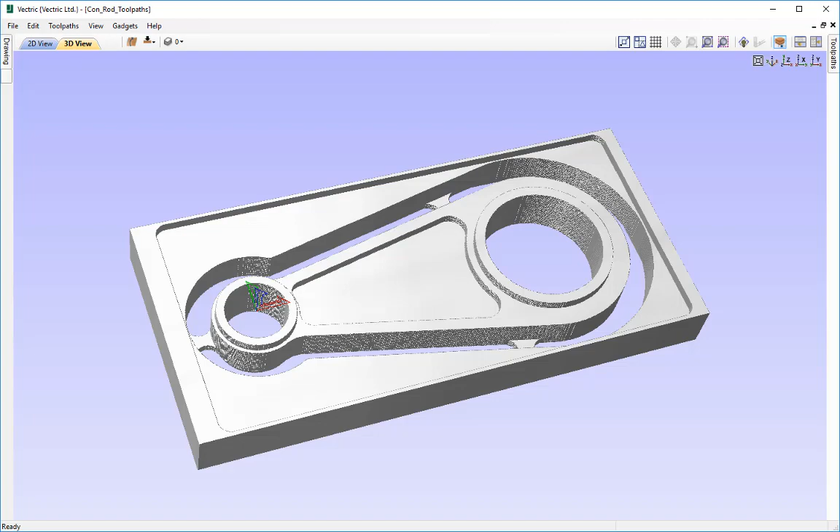In this tutorial, we're going to import some simple vectors into the software and set up a double-sided job to create the conrod that you can see on screen. Then we're going to look at how we can reposition and offset XY position, how to use imported vectors for a two-sided job, and we're going to use a toolpath preview to prevent possible damage occurring whilst machining.

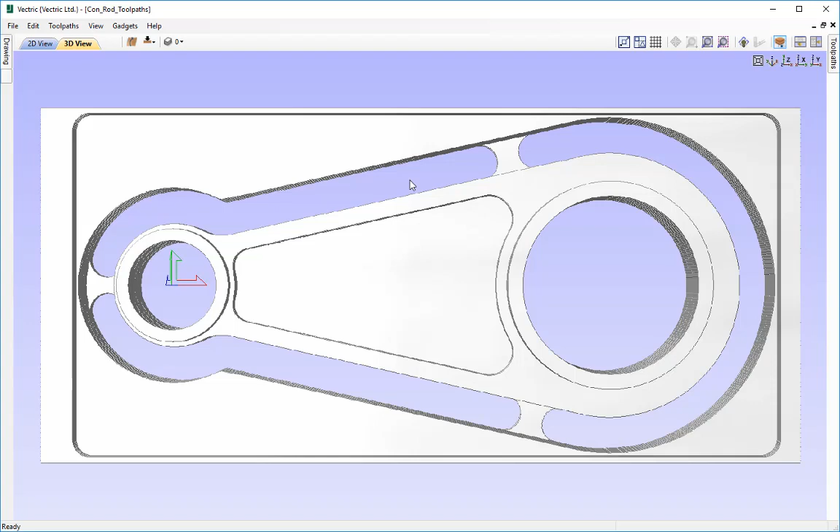So I'm just going to go ahead and close this file down, and then we're going to start by opening a new copy of the software and opening an existing file. So navigate your way through the video tutorials folders and go to the conrod files folder, and then we're going to click on the conrod.dxf file and then click on open.

Then you can see it's imported those vectors in for us from that DXF file, and we immediately entered the job setup form. So the first thing that we're going to do is choose the job type. We're going to choose a double-sided job, and then we're just going to change the job size itself. Now we are going to be working in millimeters for this, so just choose the millimeter option, and then we're going to change the width to 130 millimeters with a height of 60 and a thickness of 12 millimeters.

And we're going to choose the Z0 position. Now when we're flipping the material from one side over to the other, we can Z0 off the same surface, so the material surface as is selected at the moment, or we can change that to the machine bed. Or we can have opposites, so basically the same side is always going to be the reference point for the Z0 position. Now this is always useful when using wood or planks of wood which may be slightly uneven over the surface, so we may not have planed the material first. But in this instance we're going to be using free machining aluminum, so we're actually going to machine off this material surface for both sides.

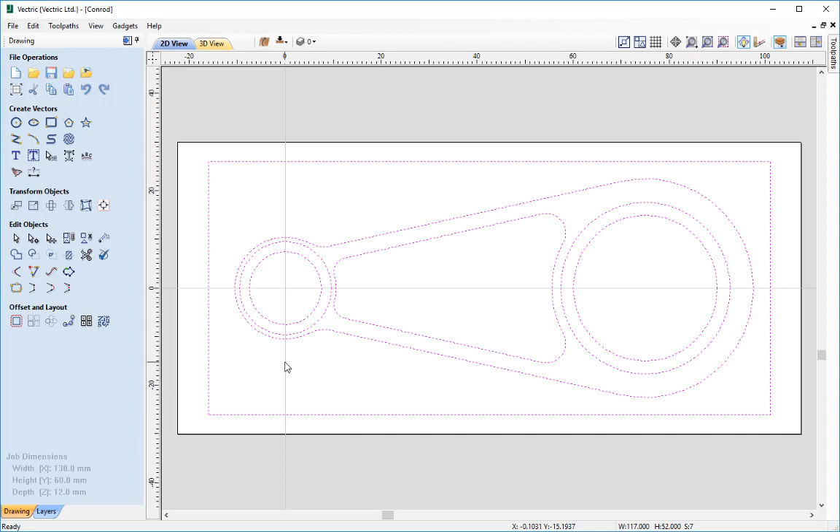So what we're going to do is we're going to press Ctrl A on the keyboard to select all the vectors, and I'm just going to right click them, and I'm going to choose this option to copy to the other side, like so. And if I flip to the bottom side, you'll see that we have those same vectors there, like so. So first thing we're going to do now we've got all the vectors ready, we're going to go over to the Toolpaths tab, like so.

And before creating any toolpath, we should always make sure we check the material setup form. So I'm just going to click the set button there, and just going to go through these. So we've got a thickness of 12 mm. We're going to keep the offset as we've created it. We're going to be z-zeroing off the material surface, and the clearance looks good, and so does the home start position and the z-gap above the material. So I'm just going to press OK to accept those, and now we can start selecting some vectors for our toolpaths.

Now, first of all, we're going to create a pocket, so we're going to pocket down 2 mm to leave this outer rim along the holes of the conrod. So we're going to select the rectangle, hold shift, and then select the outermost circle, like so. Then I'm going to go into the pocketing toolpath, like so. And we're going to have a start depth from the top of the material, so we're going to leave that at 0, and then a cut depth of just 2 mm.

And then for this we're going to be using a 6 mm end mill, so I'm just going to go into the tool database, I'm going to go down to my metric tools, and I'm going to choose an end mill of 6 mm, like so. And what I'm going to do is I'm going to edit those parameters so that they're much more suitable for free machining aluminum.

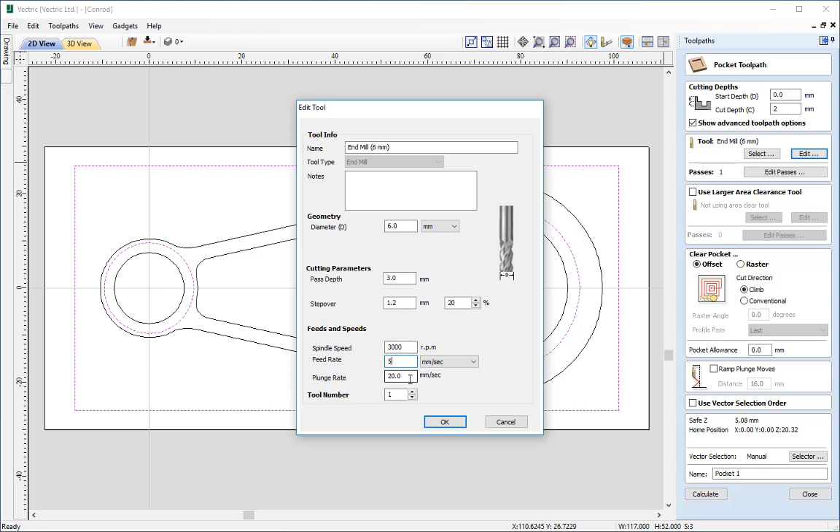I'm going to slow this right down to 5 mm per second. I'm going to have a plunge rate of just 1 mm per second. And I'm just going to press OK. Now what that's done is that's just temporarily edited the values for that tool. So once we're happy with that, I'm just going to go ahead and choose the strategy that we're going to use to clear the pocket.

So I'm just going to keep this as an offset strategy. And then I'm going to choose to ramp the plunge moves over a distance of 16 mm. So I'm just going to type 16 mm there. That just helps protect the tool as it's going down to its cut depth. And then I'm just going to give this a name. I'm just going to call this pocket 2 mm, like so. And just press calculate. And we can preview that if we like. So there you can see what that's done there.

Now we do need to do the same thing for the second side. So I'm just going to press number 2 to flip over to the bottom side. And I'm doing this obviously just so we can preview this in the simulation. So I'm just going to quickly recreate that same toolpath. So everything should be the same, even the edited parameters, as you can see. So all I need to do is just check the ramp plunge moves and just call this pocket 2mm. Again, calculate and preview. So it should look exactly the same as the top side.

So I'm just going to press the number 1, it's going to go back over to the top side. I'm going to go into the 2D view to create our next toolpath, which is going to be this vector here. Now this vector is here to create basically a pocket which is going to be used to lighten the whole weight of the conrod itself. And we're going to do this again on both sides. So I'm just going to select that vector and press close and go to the pocket toolpath, like so.

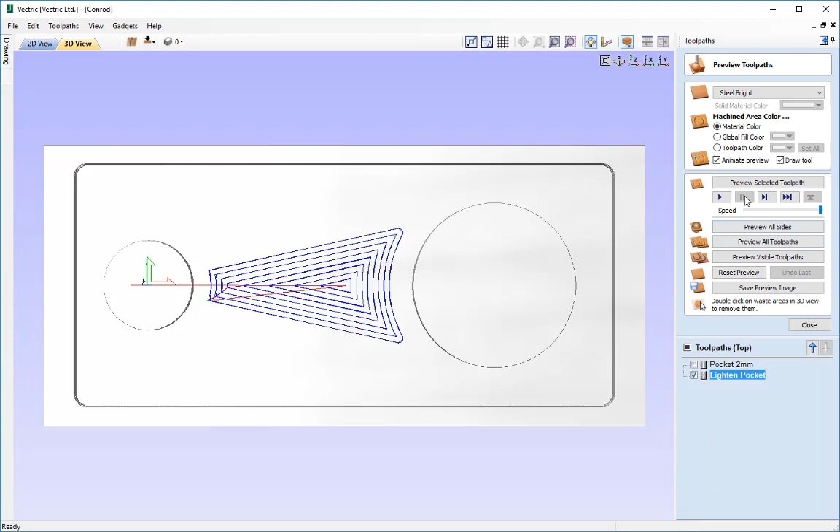Then we're going to have a start depth from the top of the material again, and just going to cut down 4mm. So just make sure that we put that in there. And I'm just going to use the same tool, the end mill of 6mm. I'm just going to press edit to make sure that those edited parameters still exist, which they do. And I'm just going to use the same strategy. I'm going to ramp down of 16mm. I'm just going to change the name of this to something more relevant, like lighten pocket, and then press calculate and preview, like so. Just going to do the same again on the second side.

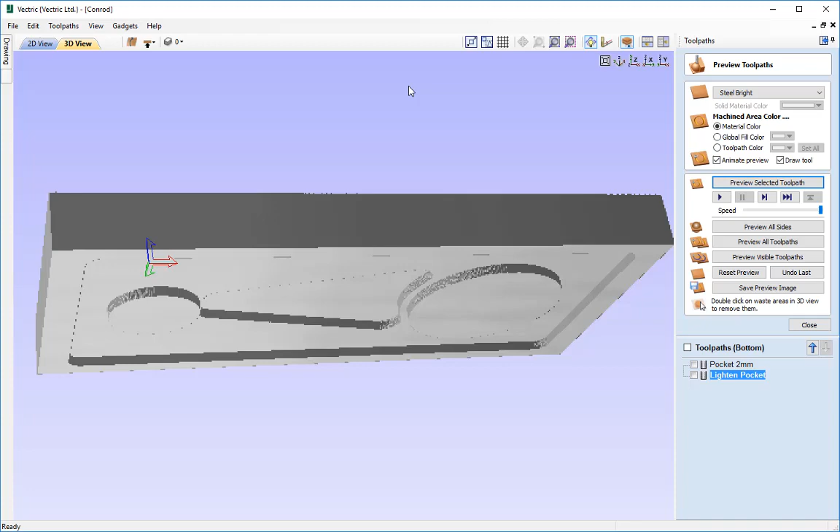So select the vector, go into pocket, everything should be the same, just make sure, and ramp and change the name to lighten pocket, like so. Just calculate that and preview that again. So you see that now we'll have something that looks exactly the same on both sides, like so.

So I'm just going to go back up to the top side, and next I'm actually going to pocket out the holes for the conrod itself. So I'm just going to shift and select the second hole there and press close, go into the pocket toolpath. Now here I can actually pocket all the way down to the bottom of the material, so I can create, for simulation purposes, just the one toolpath here.

Now I could actually use a profile toolpath here if we were using a vacuum hold down table or some other form that secures any waste material from being flung out or causing any damage to the tool or the actual part itself. So I'm just going to presume we're not, so I'm just going to pocket out that material and presume that we're just going to be extracting all that waste.

So let's change the cut depth to 12mm, which is the thickness of the material. Make sure we've got that end mill 6mm selected and the edited parameters are still the ones that we've chosen, like so. I'm just going to scroll down and I'm going to make sure that we've got the offset strategy selected.

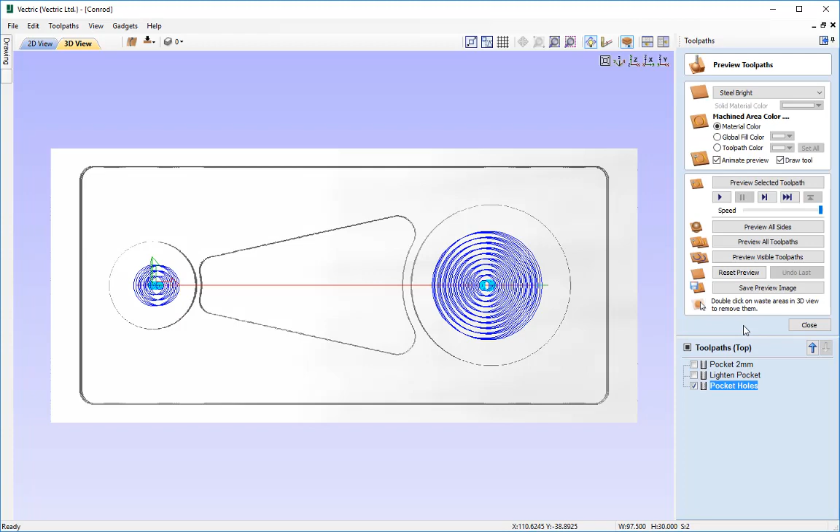Ramp the plunge moves 16mm. That value should actually still be there. And we're just going to call this pocket holes, like so. Calculate that and then we can preview. You see that's gone right through to the other side of the material, like so. So we don't actually need to create that one on the other side.

So next we can create the cutout path. So let's go into the 2D view and select the vector for the cutout, like so. Just close that. And then we're going to select the profile toolpath. So we're going to start the cut from the top of the material, so 0, 0, and we're going to cut down to 12mm, which it currently is set at there. So I'm just going to change that.

Now we do have, as you can see, the end mill of 6mm selected currently, which is good, but does it have the same parameters that we specified for cutting free machining aluminum? So let's just check the edit box, and you'll see that these are actually the parameters for the standard 6mm end mill. Now unless we add the tool for a specific machining of aluminum, we are going to need to specify these parameters again because we've not yet used the profile toolpath, so it doesn't pass on the edited parameters from the pocket toolpath.

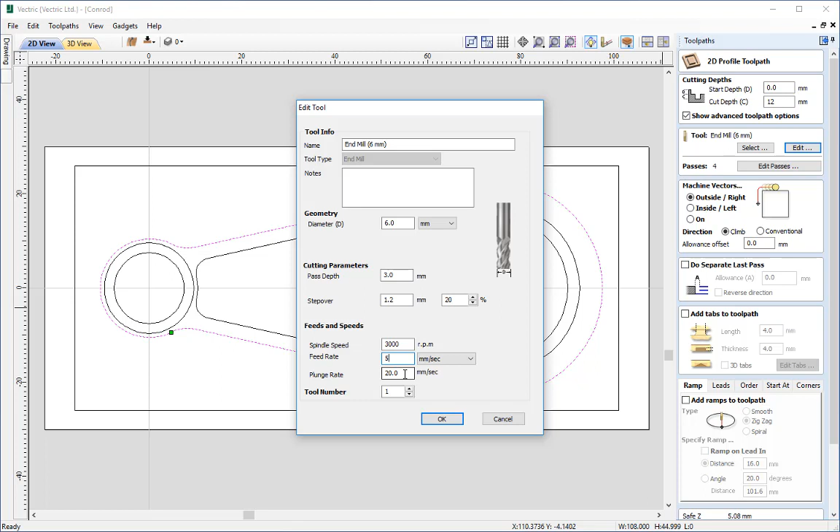So we are going to need to either add the tool in or edit these parameters here. So I'm just going to go ahead and edit these to a step over of 20%, a spindle speed of 3000 RPM, a feed rate of 5mm per second, and a plunge rate of 1mm per second, and press OK, like so. Now we are going to be cutting this conrod out, so we want to machine on the outside of the vectors.

I'm going to scroll down, and we're going to add tabs to this because we're going to presume we don't have anything to hold it down with at the moment. So I'm just going to add some tabs to this with a length of 4mm and a thickness of 4mm. So I'm going to press the Edit Tabs button to place these. So when it shows the tick symbol, I'm OK to add. So I'm just going to add them to those places there, like so, and press Close.

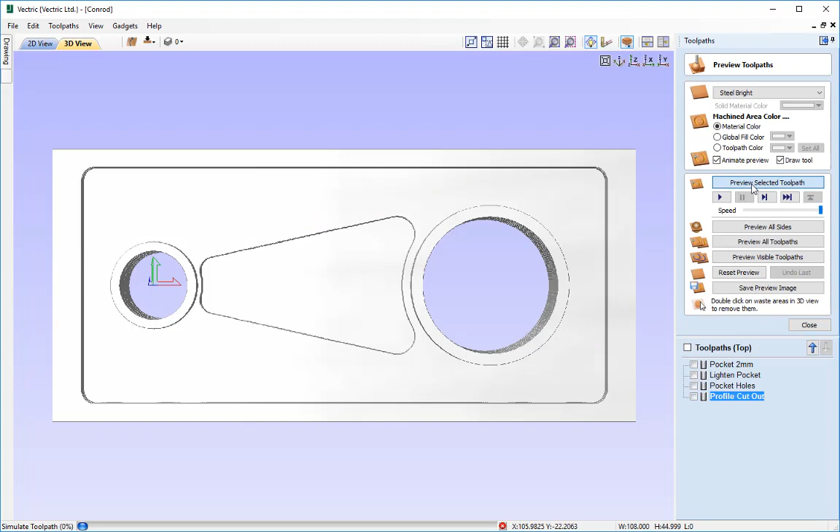And I'm just going to scroll down, and I'm just going to add a ramp to this toolpath of zigzag, which is the same as we had in the pocket toolpath. And we're going to ramp over a distance of, again, 16mm. So I'm just going to call this Profile Cutout, like so, and then press Calculate, and then we can preview the toolpath. And then we have literally a whole conrod finished.

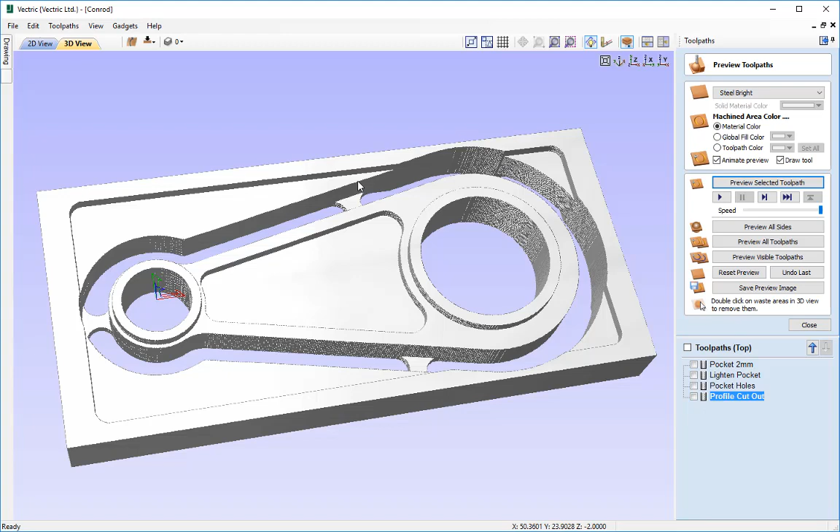Now, if you notice straight away, there's a problem here. This is the beauty of using the preview toolpath form. You'll see that the actual profile cutout itself has actually crashed into the wall that was left there by the pocket. Now, it may only be minor, but when you've got a tool that's machining nothing around here and then it suddenly collides with a wall of metal, that's going to put some strain on the tool itself. So it is possible that it could actually break the tool. Now we don't actually want to do that.

So what we're going to need to do is edit that pocket vector. So let's just close the preview toolpath form. I'm going to go back over to the drawing tab, like so, and I'm going to go into the 2D view. So what we need to do really is create another boundary for the outside of our pocket when we pocket down that 2mm. So that would be this vector here. Now we need to make sure that there's at least the diameter of the tool space in between the conrod and the rectangle itself that we're pocketing.

Now, rather than trying to measure roughly where that is, we're actually going to use the object bounds that comes with the Smart Cursor feature to create first a rectangle that fully surrounds the conrod, so we know exactly the size that we need, and we're just going to offset that by the diameter of the tool, or slightly more. So with that selected, I'm just going to press the delete key, and then I'm going to do the same on the bottom side, like so. I'm just going to return to the top side, and then I'm going to press F4 on the keyboard, which brings up our snapping options.

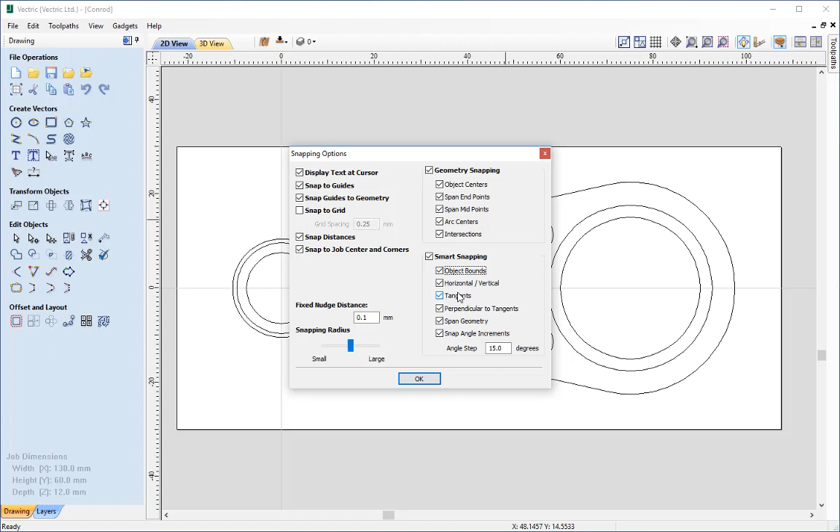Now you can also access this through the edit menu up here, and what we're going to do is we're going to turn on the object bounds, which is under the smart snapping options here. What this will do is bring up blue lines, which are basically the object boundaries of any objects that we place our cursor near. So let's just press OK on this, and I'll demonstrate this for you.

So I'm just going to go into the Draw Rectangle tool. What I want to do is draw a rectangle which surrounds literally the object boundaries of this conrod. So I'm just going to hover near here. You'll see that straight away that blue line is bringing up the object boundary line of this outer conrod. And then I'll come over to here, and you'll see that the vertical blue line has now appeared. Now, because they're both blue, that means they're both object boundary lines.

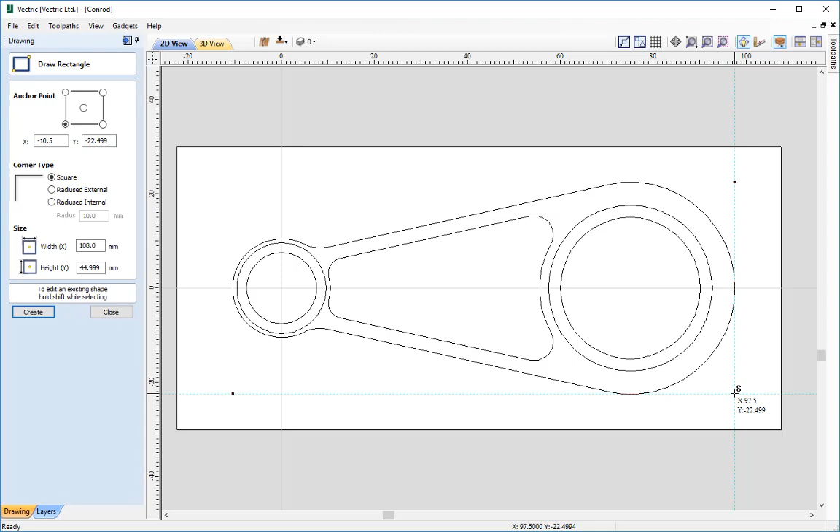So I can be assured that if I start clicking here and then dragging outwards, I'm going to be passing through both points here and here exactly. And then I'm just going to pull it upwards until the blue lines meet again. You'll see that'll be here, like so. And then all I need to do is simply let go of the left mouse key, and that'll create the rectangle perfectly to size around my conrod.

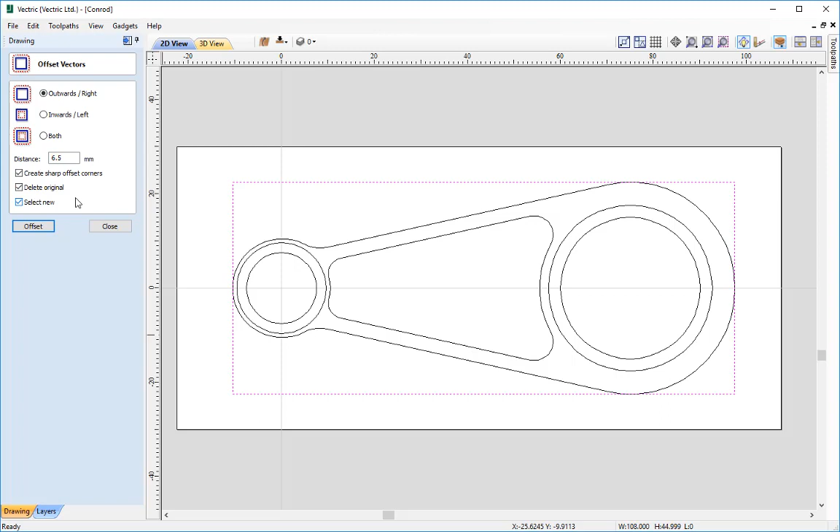So I can close this now, and I can simply go into the Offset Selected Vectors tool, and we're going to offset that rectangle that we've just created outwards around about just over 6mm, so about 6.5mm. And we're going to create sharp corners. We're going to delete the original vector that we created, and we're going to select the new one. So let's press Offset, and that's now created our new vector.

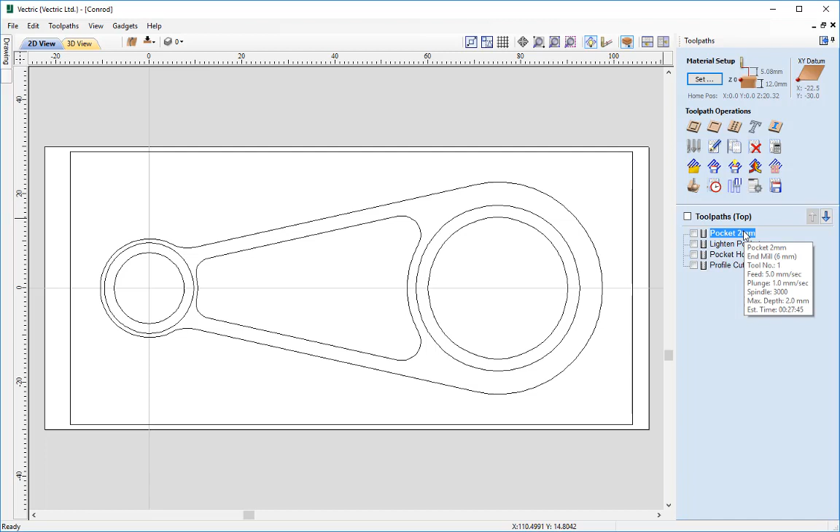So we can close this, and we can now right click that vector and copy to the other side, and we can just go ahead and edit those pocket toolpaths. So let's go into the pocket 2mm toolpath, and you'll see that those two original vectors are selected, and you just shift and select that new vector, and if we just scroll down, recalculate that.

And then if we do that again on the second side, I'm just going to go into the 2D view there and press the number 2, go into the pocket by double clicking. You see that those two vectors again are selected. Shift and select that outer vector we've just created and recalculate.

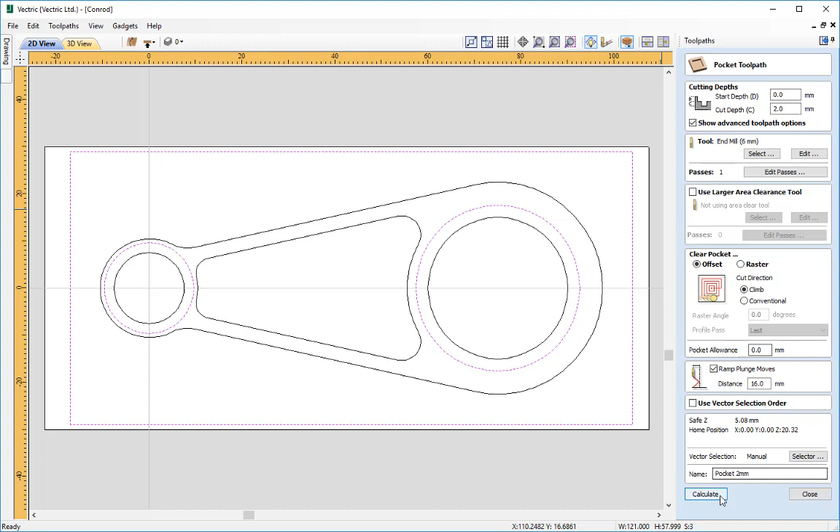And now if we reset the preview and preview all sides, we should have a nice collision-free toolpath, as you can see there, like so. So it's definitely well worth previewing all your toolpaths to avoid any hazardous situations. And now we have the perfect conrod built on two-sided machining, like so. As I mentioned, we only really need to create the one set of toolpaths to create the toolpath for both sides of this conrod.

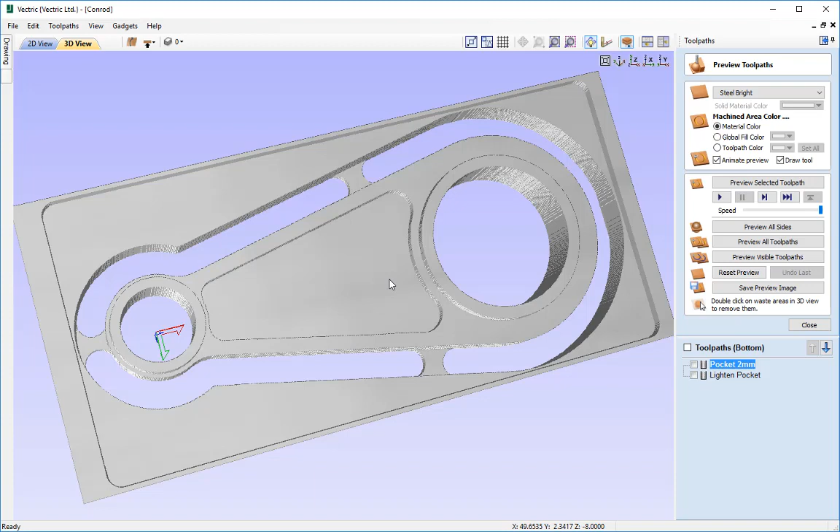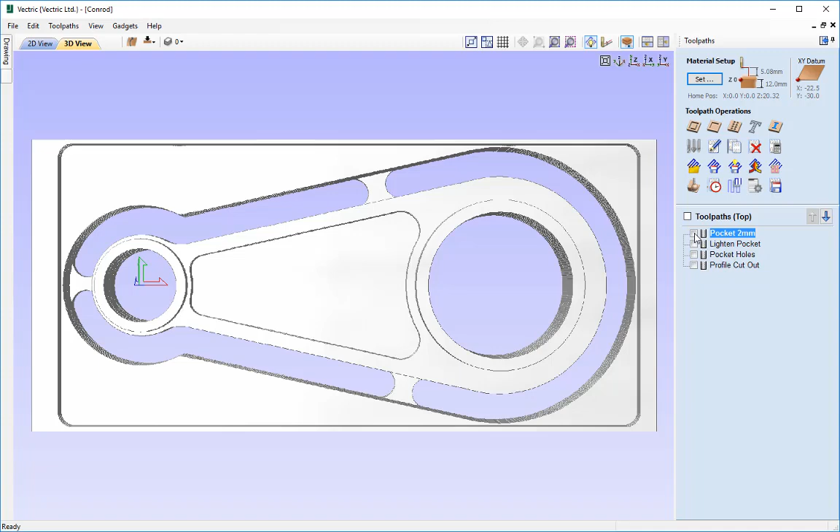So we'll just close this and go back over to the top side by pressing the number 1 in the 2D or 3D view, like so. I'm just going to spin this back round. So we only really need to create these 4 toolpaths, and 2 of them we only need to run on the one side, which is going to be the pocket, to pocket down 2mm, and the lighten pockets. The rest can be run on the one side, so that would be the pocket holes and the profile cutout, because both of those are actually cutting down the full depth of material. So there's only two toolpaths that you actually need to run on the opposite side.

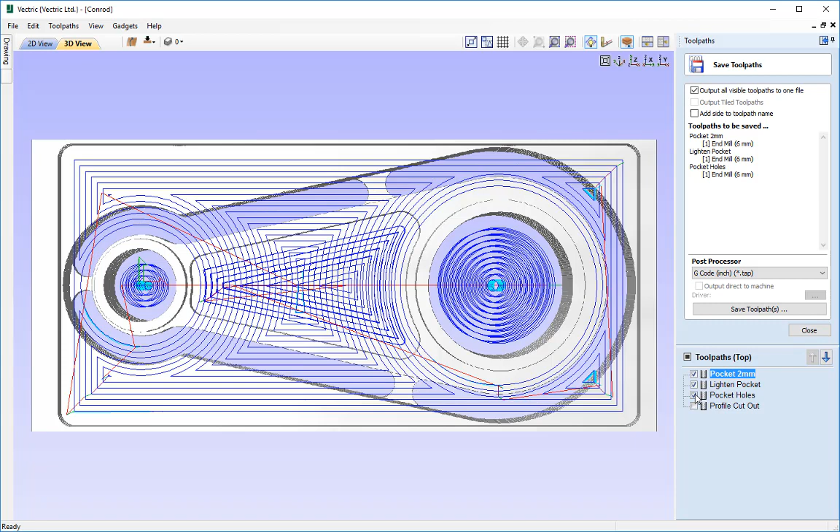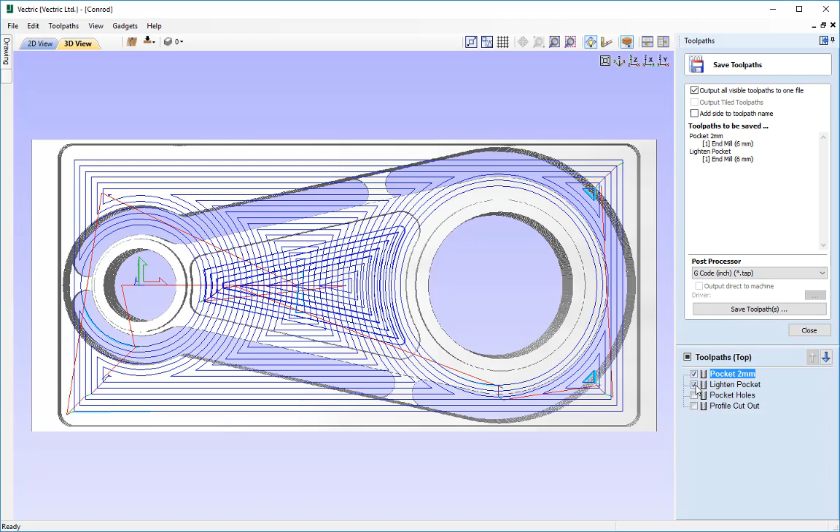Now how we would save that out is we would go to Save Toolpaths, and at the moment it's selected all of them because we are using the same 6mm end mill. However, what I would do is deselect the ones that I don't want, and I would select output all visible toolpaths to one file, as that was already selected in my options. It may not be for you. So I'd choose the pocket and then lighten the pocket, save those out together with my selected post processor, and then I'd run that same one on the other side, and then I'd also run the pocket holes and profile cutout after those as well.